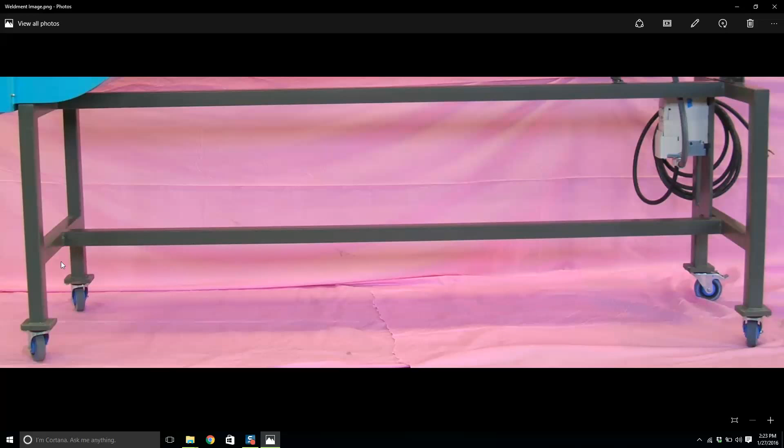Hope you're doing well. We're moving on to weldments number 2, and today we're going to the class work, just going over it. We're going to create a drawing for this - it's just an equipment base, a big long weldment with some casters on it. Something I drew up years ago. But the main thing is that it's a real part that was made, so I'm sure there's some dimensions missing.

So let's have a look. Let's get SolidWorks going. I'm going to create a 3D sketch. Here we go, 3D sketch.

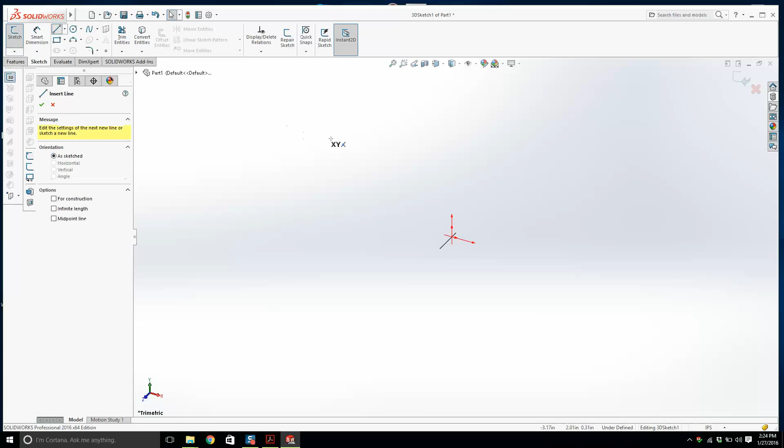We're just going over weldments. You're going to learn - we're just going over it, you're not going to really cover anything new.

So I'm going to draw 2 lines, and we'll make this the midpoint, and this is going to be along the Y, and these 2 lines are going to be the same along the Y, and the distance between them is 20.

So we make that 20. Now if that's 20, what's the length? It looks like from end to end is 101.5. Is that right? 101.5. Let's double check it. 101.5. So we have those 2 lines, and I'm going to hit tab.

I'm going to draw the end parts of it. Now we should be able to mirror that down, we'll just do one side. I'll go midpoint and midpoint, and let's make them the same length. Let's try that again.

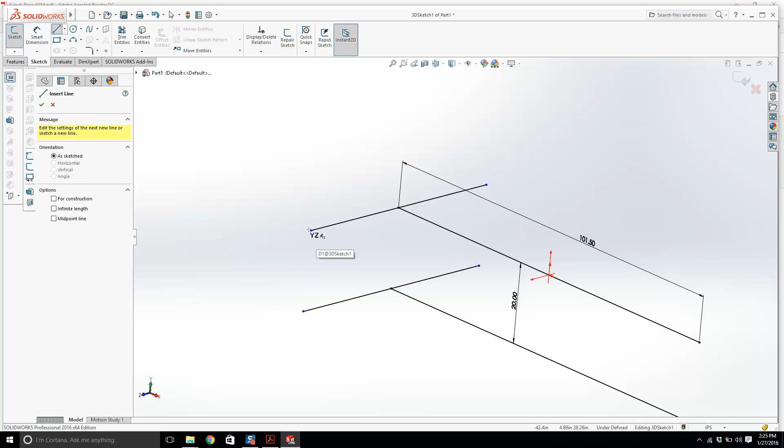Alright, what is it now? It's 14 plus 2 on either side is 18. We'll make this 18. Make that 18. What's the length of the legs? It's saying 28 is the length of the legs, plus 2 is 30.

I'll tell you what's going through my head. I'm just going to draw this out, and then I'm going to create the drawing of it, and if my dimensions are not matching up with this, then I will adjust the dimensions. That's what my plan is. So I got 30. I'll make these 2 equal.

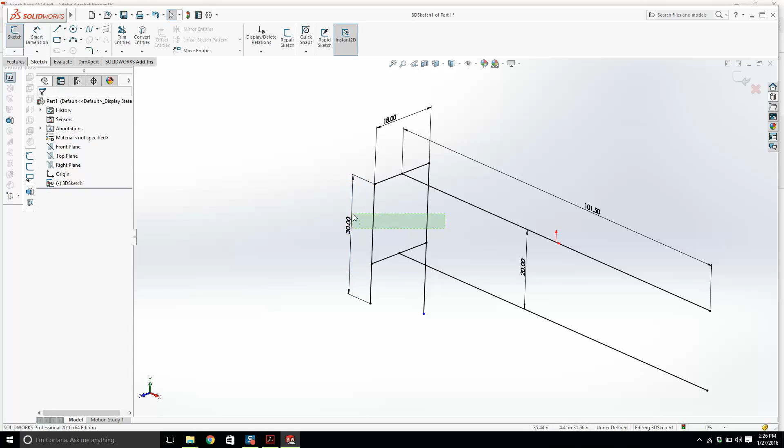Okay, I think that's enough. I'm just going to mirror this down to the other side, and then we can put the feet in. So let's go to here, it's 2 by 2 by 1/4 of an inch. Alright, we have one there and one there. That might work, yeah. And then we have one there and one there.

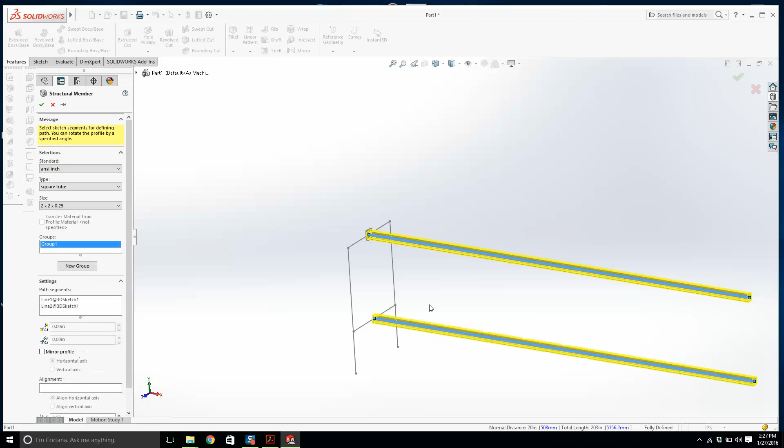See, that's - let's just have a look at this. We have, yeah. So we get that. Okay, we got that and we got that. Okay, new group - what about that and that? Okay, let's go to here. Let's go locate profile, let's lock it to the top.

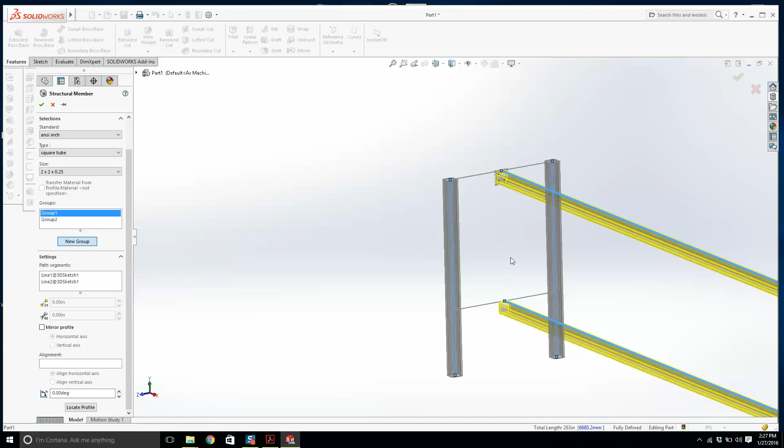If my explanations are a bit short, I made about an hour-long video on this, and Snagit bollocksed it up and lost it. I don't know how - if you've ever lost work before, it's twice or three times the motivation to redo it. I'm going to do my best. That's no excuse. Alright.

We'll do a new group. Okay, we got that, I'm going to click here. Now it's after extending that - we got to slow down here for a second. Let's see what we can get. No, I don't want it to extend that, but I don't really know because I don't know the dimensions.

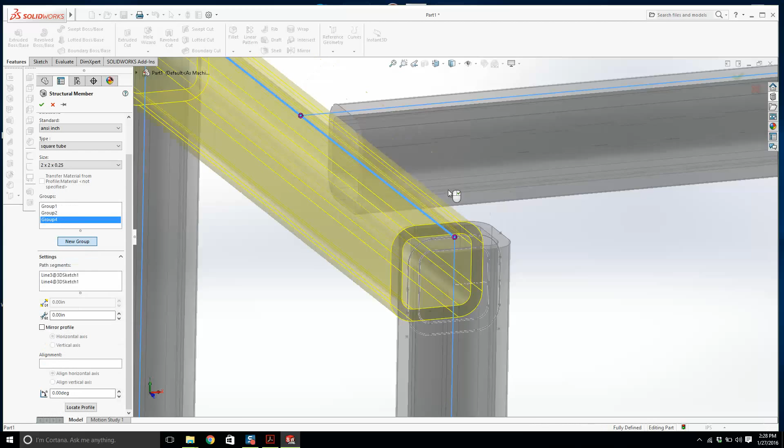And there, we'll locate the profile. Okay. That's good enough, okay we got that. I'm probably confusing some of you - what I'm doing is I'm just drafting this out. Look, what I'll do is I'll mirror it and then I'll check the dimensions.

Okay, we got that. Let's mirror it over - bodies to mirror, this and this. Okay, now we got that. Is that, it's not okay? That's fine if it hasn't trimmed it. We got a bit of an issue there. Okay, let's check the dimensions first.

So the end to end is 101.5. So let's check that - I'll go from there to there, and what do I get? 103.5. Okay, 103.5. So we'll go back to here.

I need to take 2 inches away, so 101 minus 2 is 99.5. Let me do that again. 101.5 - I hope you understand what I'm doing here.

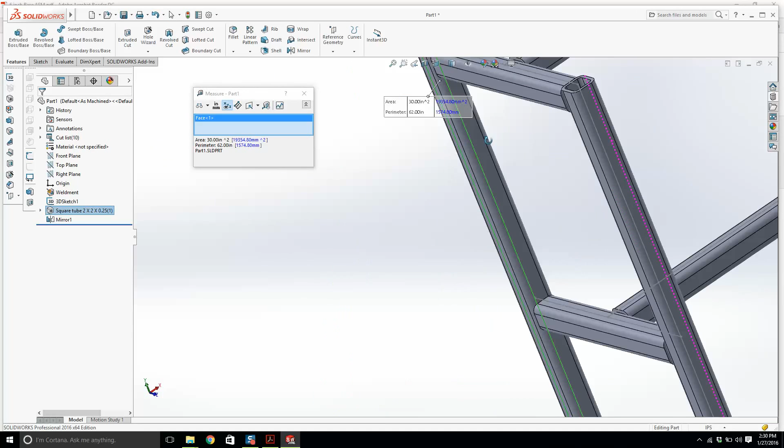We got 101.5. I got 30 from top to bottom - from all I need is really that line there. That's 30 from top to bottom. That's good. And then from there to there is 20, and I have 14 plus 2 is 18.

So I need to get rid of 2 inches there. So this is 18, we'll make that 16. Sorry if I'm going too fast and it's confusing you. Anyway, this is good, we've got no interferences there.

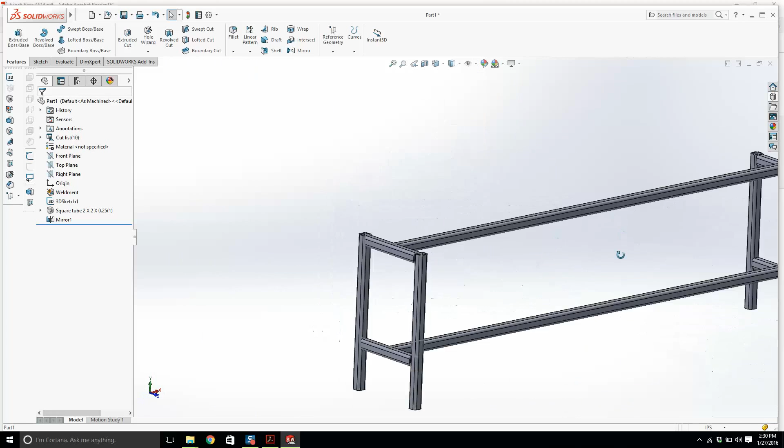On the other side, I need to trim this bad boy and this lad here. So what do we do? I'm going to go to trim. Bodies to be trimmed are that guy and that, and then the face is just that face right there, and it should cut both of them. I'll click okay, and it gets rid of the smallest piece automatically, and you're left with that. So that wasn't too bad.

Okay, we got this, I'm going to save this. I'm just going to save it here. We'll call it Weldments number 2 classwork.

And then I'll look at the feet. We're going to draw one foot, and then we'll mirror it all around. So I'm going to create a sketch on that face there, go normal to it, and get a rectangle.

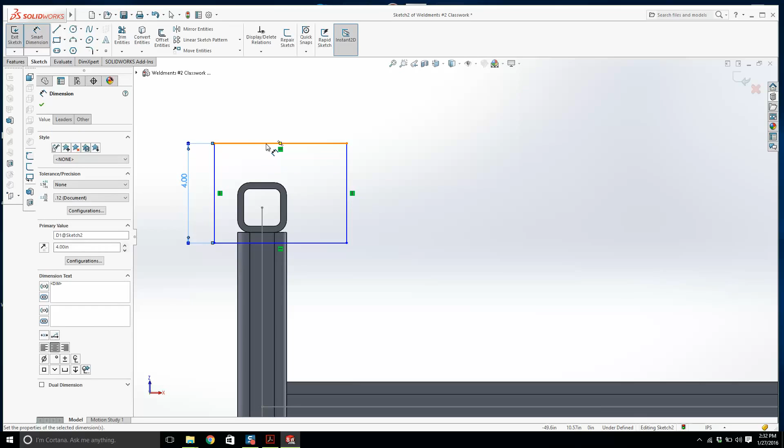It's 4 and 7. So this is 4, that's 7. This is a half inch, as I can remember from about half an hour ago. Half inch, and we'll get a center line.

I suppose the best advice I can give you is you should be able to - this should be no trouble to you. So just make sure what you're drawing matches these reference dimensions. I don't really care how you get there. Okay.

The fillet is 0.75. Come on now, let's get rid of this line, and let's go from there to there, and we'll extrude it - it's a half inch.

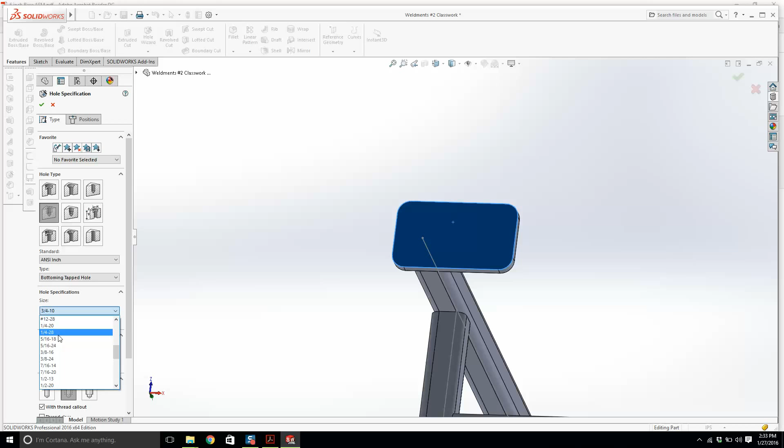Okay, the next thing we want is hole wizard. So it's 5/16-18. Let's close this down, we don't need that open. So it's 5/16-18, 3/4 is not right. So we have two 5/16 sizes - one's 18 and one is 24. 24 is the fine thread, 18 is 18 threads per inch. So the size of 5/16 is 0.3125 and it's 18 threads per inch.

Okay, so I'll click on positions and go 1, 2, 3, 4, and go normal to it. I'll get myself a center line. I'll make these lads horizontal and vertical, and I'll make this and this and this guy symmetrical.

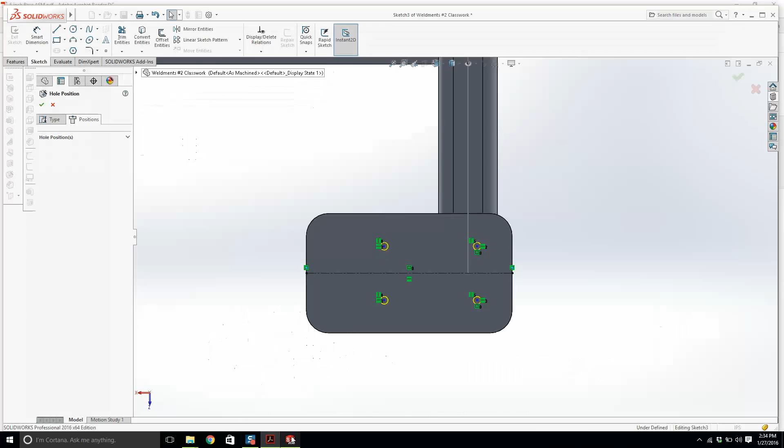And let's look at some dimensions - we've got 3.4 and 2.4. In reality these holes are off because I put a caster on it, so I'm going to leave these floating for the time being. Just leave them there, they're good. Trust me, leave them there, don't even put any dimensions on them.

Because they're wrong. And then let's get another hole - I'm going to go back and fix those later, it'll make sense. And then we have 3/4-10, hole size is 0.75 and it's 10 threads per inch, so it's a pretty coarse hole. 3/4-10, alright, it goes there.

What is this big threaded foot? There's a leveling foot, a big massive threaded foot. When you think of a foot, you think of a real human's foot, but it's just big - it's like a big threaded screw with a rubber end on it that they can lift up and level out the equipment if needed. So it's 0.8 from the front.

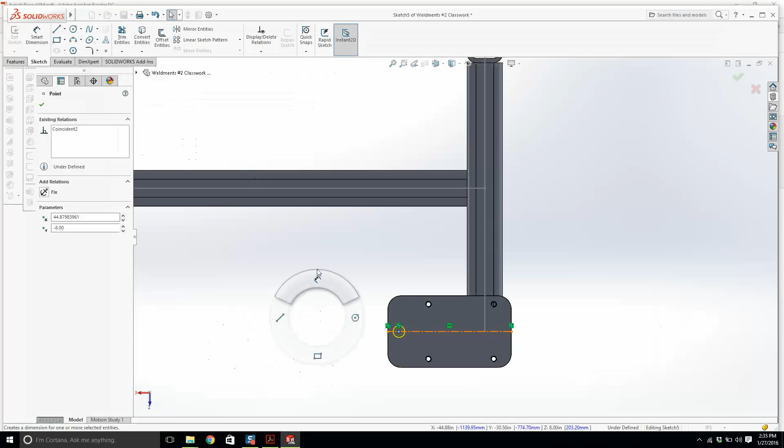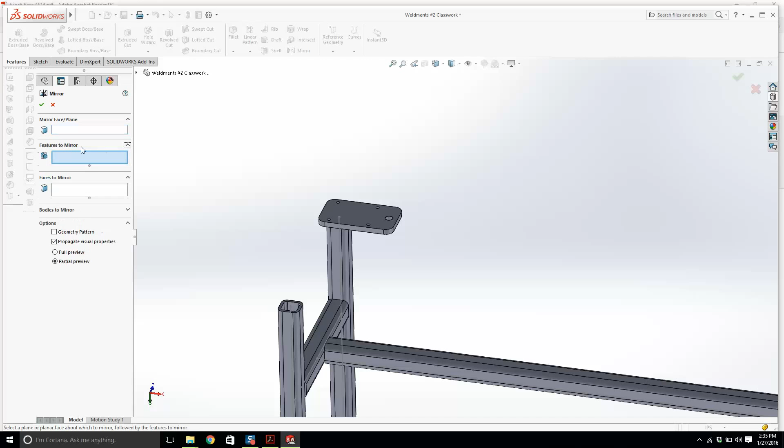Okay, now we got that. What we're going to do now is mirror it. Now, as I was saying before, whenever we mirror, let's do it - we'll mirror. You typically go to features to mirror. If that doesn't work, I would advise you to use bodies to mirror. And whenever you're doing weldments, each of these are really considered as bodies - they're all different bodies. So we click on this body.

Okay, the mirror face - I should be able to pick one of these planes. If you did not center your original 3D sketch, your mirroring will get screwed up, and it might get screwed up now, I think. But let's try that one there - that one looks well, okay, that looks okay. Let's check it, let's try the other one. If it doesn't work, you can always put in a reference plane - it's not the end of the world.

We'll do mirror, bodies to mirror. We'll mirror that guy and that guy. And that looks good, we'll go okay.

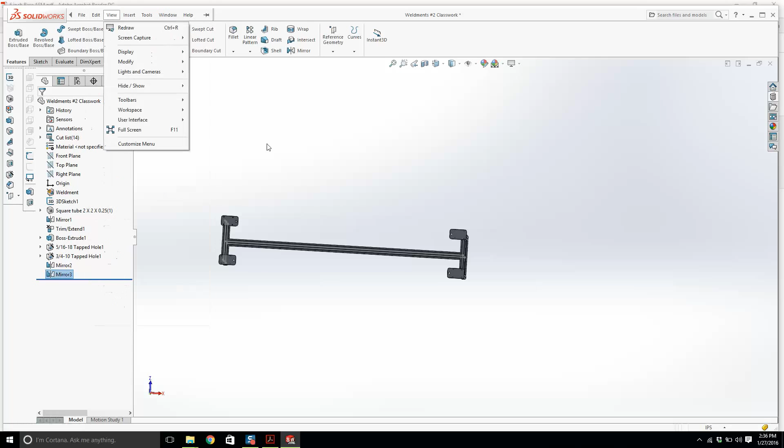And what else do we get? We've got to put in some end plates, and we've got to put in some gussets. So we'll get the end plates going - end caps. Alright, we want the corners, we want the chamfers, we want it to be inside.

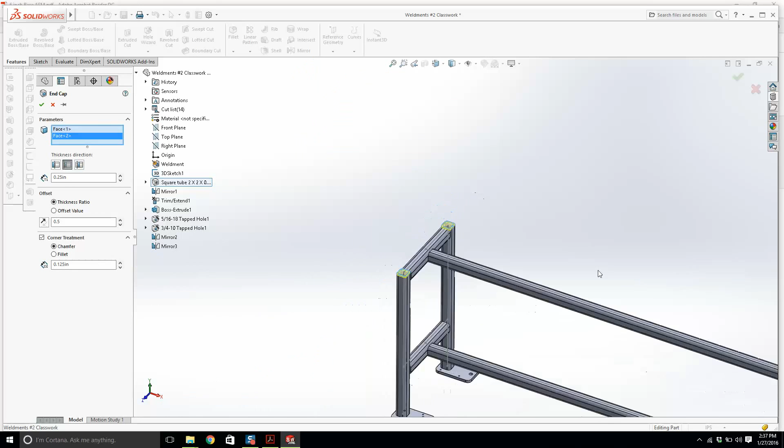Okay, that looks good. That looks the business. Let's put in some gussets as well for good measure. We'll make them 3 by 3. 0.25 is just fine. I'm going to hit the pin.

Now that puts in one. If I put in another, if I press enter, will that work? That'll do the job. I like that. That's faster.

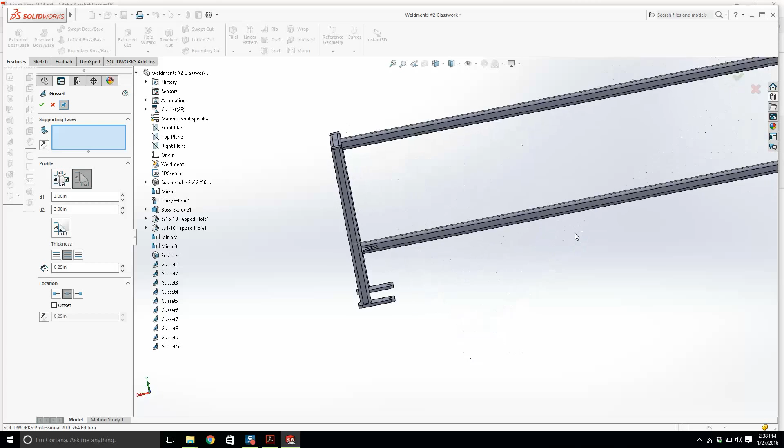Okay, so I'm just going through this here. We forgot this one here. I think what happened in real life when the guys made this, they just said to hell with those gussets. They're like, are you kidding me? But there's no harm in you guys putting them in just for practice, okay?

Do we have them down that bottom corner? Yeah. So we have the feet. Take your time, I know I'm rushing through it. It's just my second time doing it today.

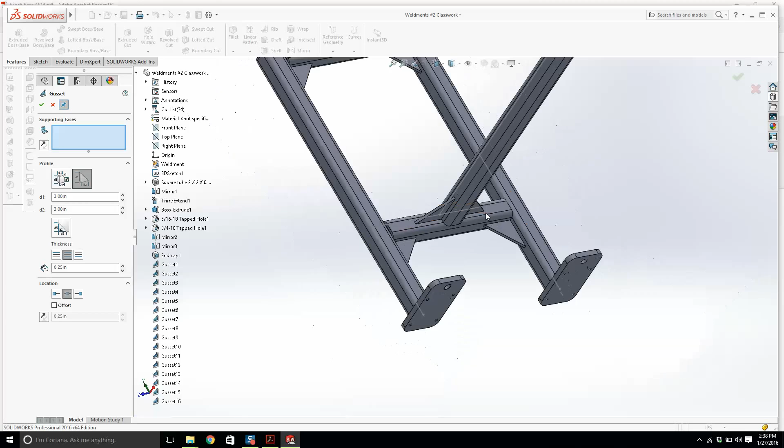Okay. Hide all types. Is that it? That's the assembly. Let's save it.

Okay, in your drawing we have casters. So I'm gonna get these casters from McMaster Carr. So we go to McMaster Carr, I'll type in the number. It's a cushion grey polyurethane on polypropylene wheels. They're lightweight. I would have thought we would have went with something a bit harder, a bit more structural, but that's fine.

I'm going to hit save, and I'm going to just stick this in the... I'm going to stick it on the desktop, okay? And what we'll do is I'll open it up. All right, there it is, beautiful.

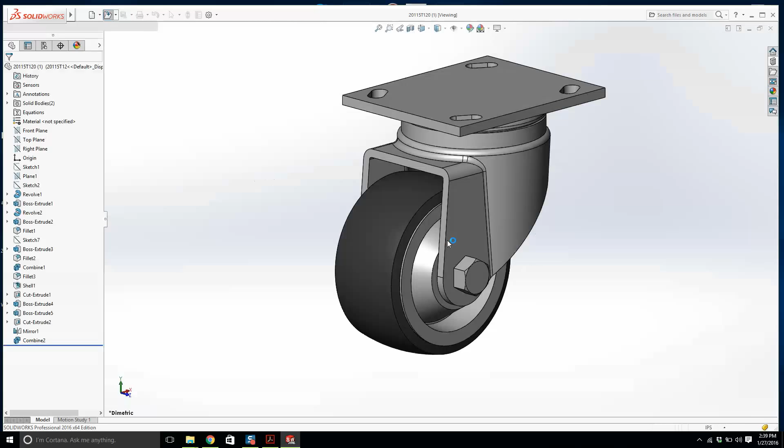The nice thing about McMaster Carr is whenever you buy a part from them, it's going to be a bit more expensive because they just are expensive, but they always provide you with a Solidworks model, which is nice, makes life easy.

Right, so let's go new assembly, and I'm going to put in the... Now slow down, don't plonk it right in. Read what it says, this is something I learned new. Select a component to insert. We've done that. Then place it in the graphics area or hit OK to locate it at the origin.

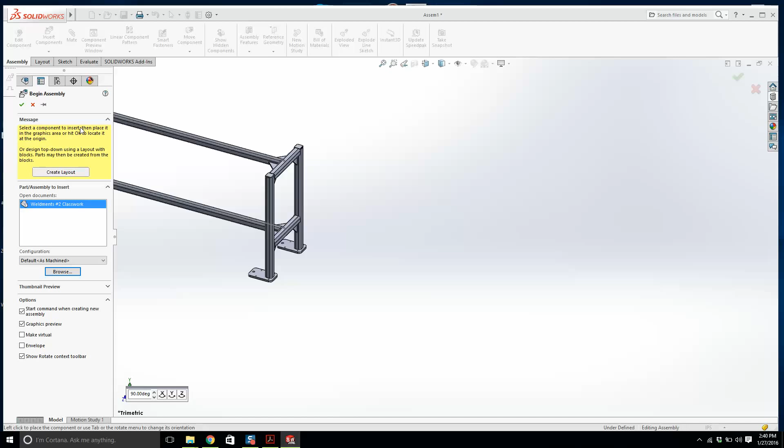Is that a good thing? Would we like it to be located at the origin? Yes, so I'm just going to hit OK. And look what it does - it fixes it, but look where the assembly right, top and front planes are. So that will work for us.

We're going to be mirroring stuff left, right and center. Now I'm going to insert the caster. Okay, you know where it goes. I'm going to mate this face with there. I'm going to mate using a width mate, a width mate.

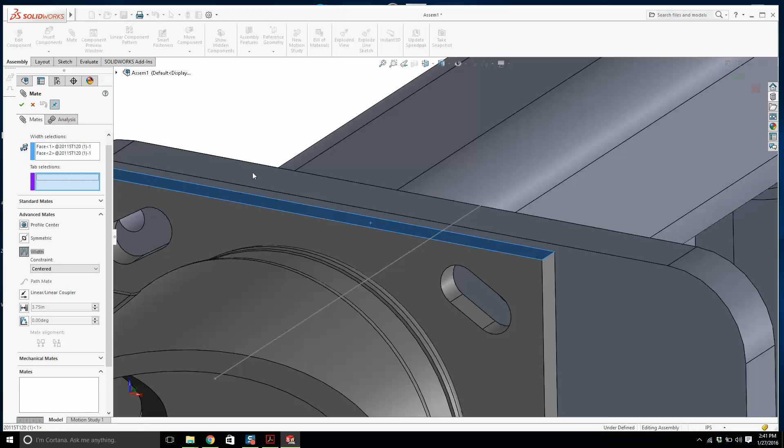Watch this, it centers it up, that face to that face, and I want it centered between that face and that face. It doesn't really matter whether it's a width or a tab, you can change those. We're going to make this - I don't want to move this caster too far down near that threaded hole, so I'm going to mate this to here. I'll make that a half inch.

Okay, now look here, those holes do not line up with those tabs. The dimensions that I gave you were wrong. So I don't know what happened there, but anyway, so let's fix the holes.

I'm going to do this. I'm going to turn on the wireframe hidden lines so you can see the slots. I'm going to right click on my part and I'm going to edit it in place.

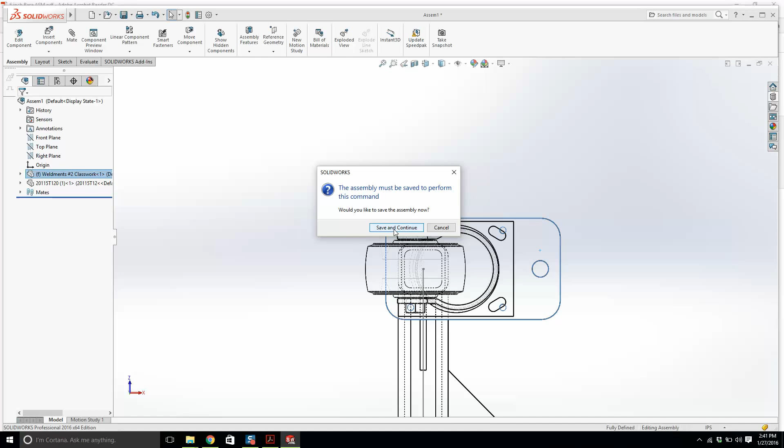Before you can do that, it wants you to save the assembly. So we'll call this Weldments number 2 classwork assembly. And then what do I do? I drop down my feature tree, even though I'm in an assembly.

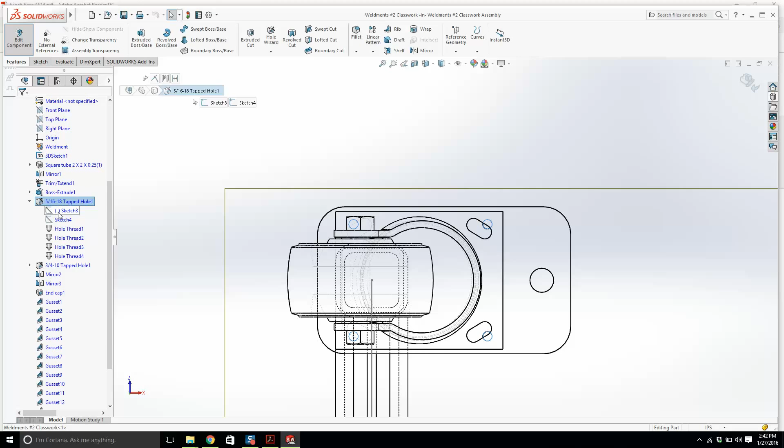I want to change these tapped holes, so I'm going to edit the sketch. Okay, what I'll do is I'm going to get a center line, and what I'm doing is I'm referencing those slots.

Okay, now hold on, I want to explain something important. So let me just do this first, then I'll explain it. Okay.

And I'll make this midpoint on there, and this midpoint on there. No, now why won't that... will it allow me to do it? Can I go and make that midpoint? That works. That's black and that's black.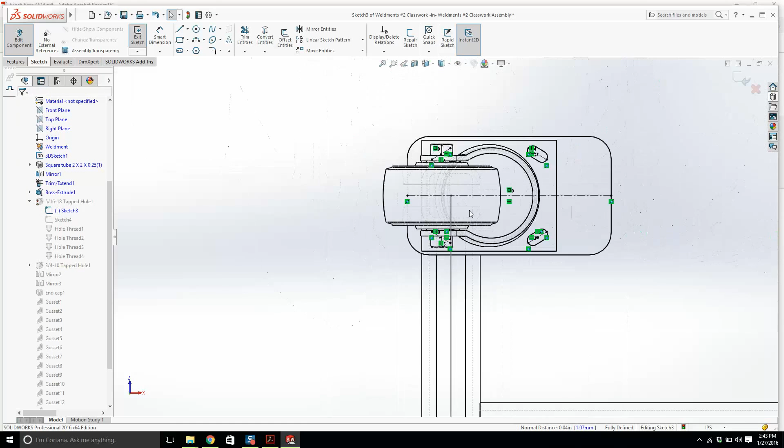Right, so I'll go ahead and rebuild everything. And you can see now the holes line up in the center of the slot.

So this is kind of important. What I just did there is I created an external reference to this caster, don't worry about that word so much. If I move the position of that caster, let's say I move it an inch, I'll do that real quick.

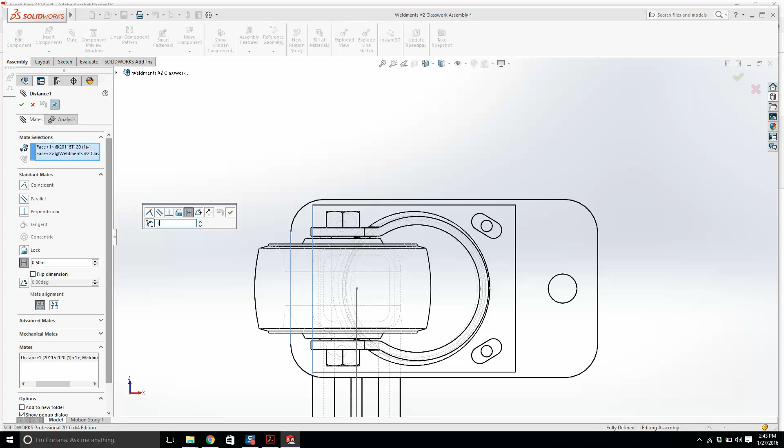In theory, what should happen is those holes should follow. I'll make it an inch, but they didn't follow. What am I going to do? I'm going to rebuild the assembly. Is it going to work? Interesting, it didn't work. Right, so there was an issue with those.

Yeah, there's an issue here somewhere. Okay, that's not good. Yeah, that fell on its arse. Now, I'm going to fix that. That should have followed, I don't know why. Let's put this back and let's make that 0.5, and let's see, does that fix it? I'm going to hit rebuild.

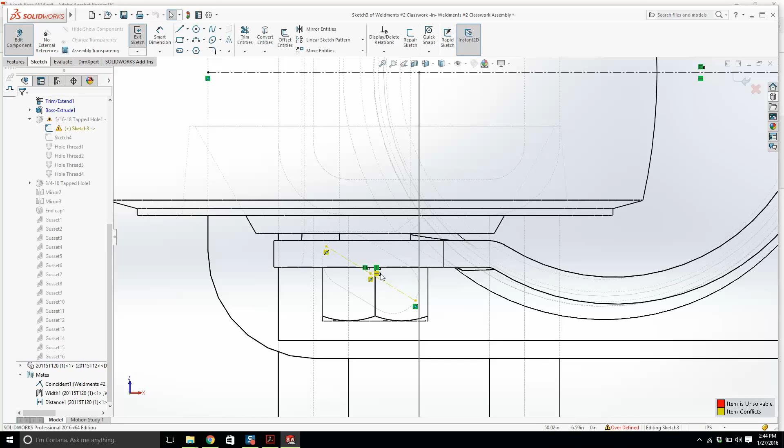It doesn't. Okay, now I've got to go back here and find out what's going on with this, yeah, see, there's some conflicting relations. We don't need these verticals and horizontals. I bet you I can get this to work. Let's make this midpoint, let's get rid of these verticals.

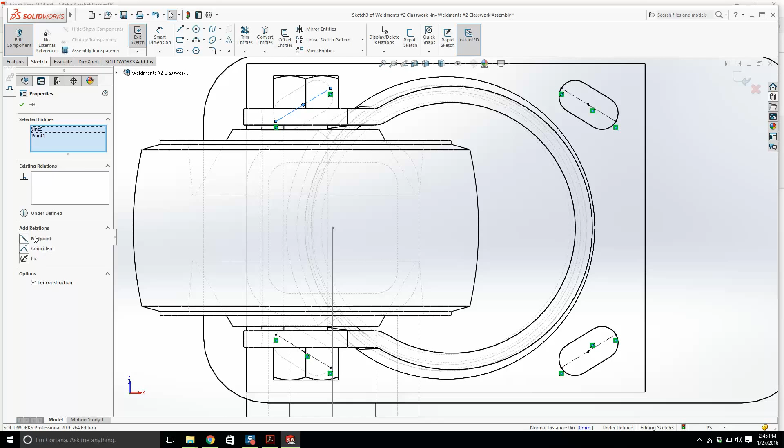Is there anything there? We don't need that symmetrical relation. Let's make this midpoint there, and let's see, does this work? I'm going to save that. I'll go back to my distance mate, I'll make it 0.75.

Okay. Is that right? Did I just screw that up? 0.75, okay. Now it followed it, okay. Let's bring it back, so that's good.

At least that works. There was an issue with the original horizontal and vertical relations that I put in. If you can understand that, that's kind of a big deal. That's going to save you a lot of trouble. That's an important step.

Okay, so we got that. So what I'm going to do before I mirror this over, I'm going to get the washers and I'm going to get the bolts. Okay, so let's just turn this off, let's turn off these sketches that I see here.

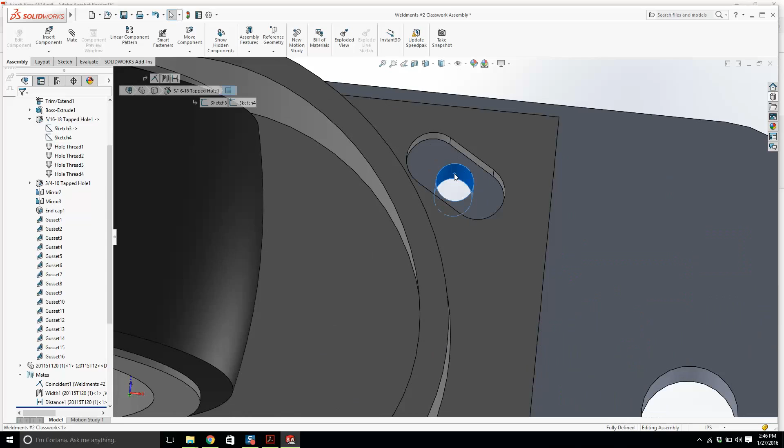Okay, so what is the thread here? There's a threaded hole there that we can't see, let's turn it on. Options, document properties, detailing, shaded cosmetic threads. Okay, is it there? No. Anyway, it's not coming up.

Alright, we have a 5/16-18 hole there. You would put a washer in, and then you would put a hex bolt. So let's download them.

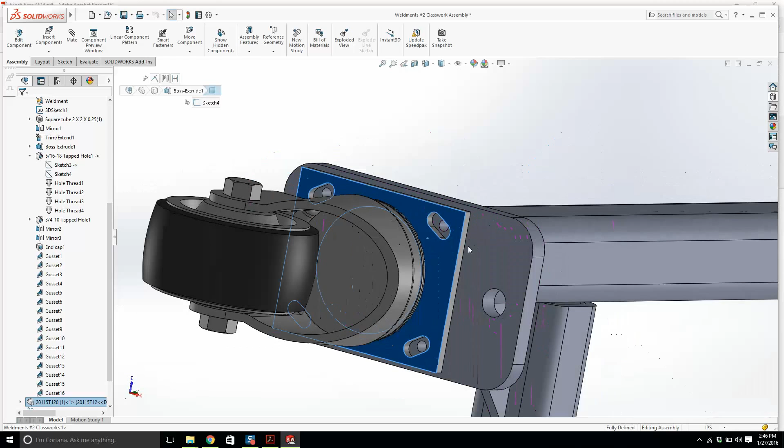So here, what do we put in? A washer, standard washers. And we'll do a screw size of what? 5/16, first screw size 5/16, flat. I'm going to pick the first one. It will work, or I'm sure all of these would work. They're for a 5/16 bolt.

Alright, I'm going to save it, I'm going to download it, I'm going to put it straight into my assembly. It's best if you download these into a folder and then bring them in. Okay? Let me show you how to do that right, or it's going to bite you in the arse.

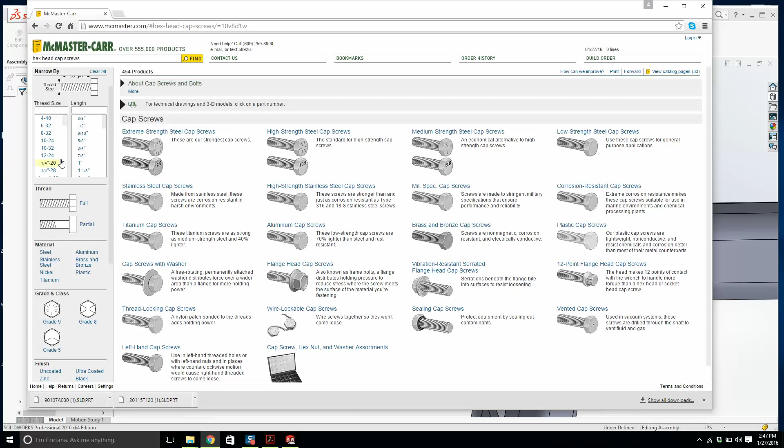Hex bolt, cap screw, what is it again? It's 5/16-18, the length is 3/4. We want full threads. You don't want it made out of plastic or aluminium, it will just break, you're going to make it out of steel. If you have the money, get a bigger grade, a higher grade, because it's stronger. This one will do.

Right, I'm gonna right click on this. Let's just click on it, it opens it up. I'm going to save as and save it on the desktop. Okay, save it in the same project folder. Okay, now we're going to insert it.

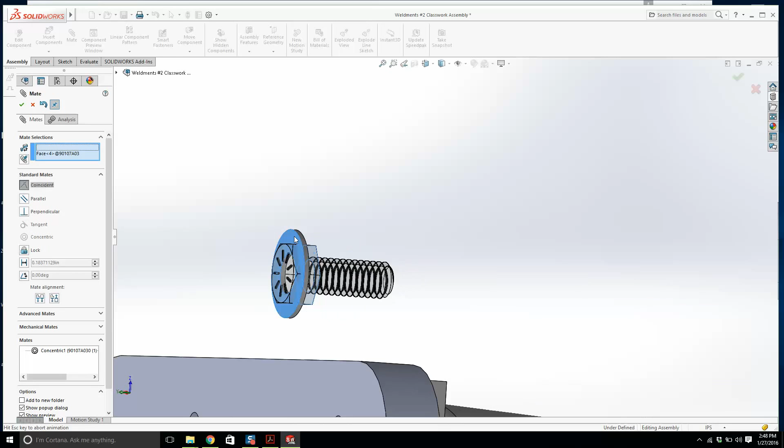Okay, and I'm going to mate this guy. It wants a tangent mate, let's try that again. This to here, watch that, see how it'll center it. That face to there, okay.

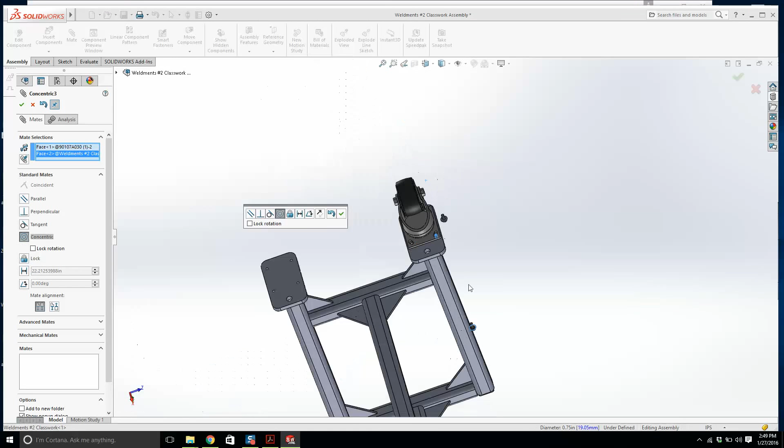Now I'm going to copy and paste this assembly. And what I found is it seems to put it very far away for some reason, I have no idea. So we put that inside there, but we'll flip it, and then I'll get that face with that face.

I'm going to rotate this component, just get it in the right orientation, and I'll get that concentric face with this concentric face, there to there, and there we go.

We've just installed half the hardware. I click on this face, on this part. I want to look for its front plane, and look what I'm going to do now. I'm going to go mirror components.

Now you're seeing me move at the speed that I would totally move. So I apologize if I'm going really fast.

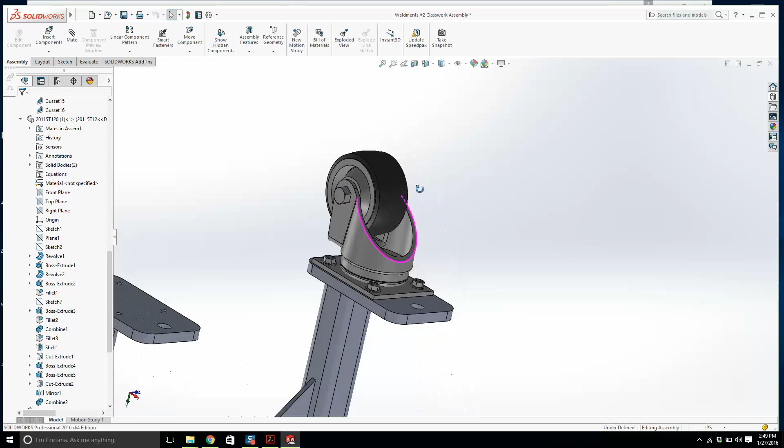Anyway, that there is all the hardware to bolt that caster in. Alright, now watch this.

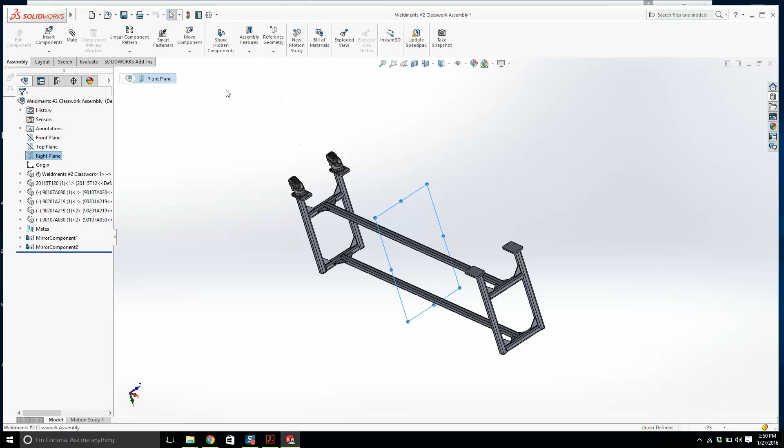We'll click the right plane. I'm going to go to mirror components. I'm just going to click here, grab all of this, and go OK, and it goes boom. Then I'm going to click this face, go mirror components, grab all of this, go OK, and now I have that there.

So there is the assembly. Now what do we need? Hold on a second. I'm going to create a view in my drawing that has an exploded assembly, just shows how this all goes together, just for one of them.

So I'm going to go here, right on the third tab, right click here, go new exploded view, and I'm just going to click that and that and that, all of these parts just on one side. You'll see in a bit.

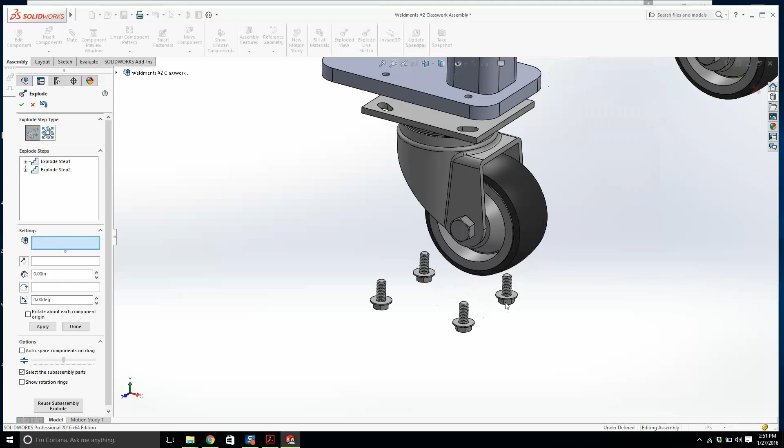I'll drag this out. This is good. Then I'm going to grab this and pull him back, and then I'm going to grab these four and pull them out, and that's it. That's all I need. I'm going to hit save, and go save all.

Let's close it down, and let's close this down. We're going to create a nice drawing for this. This was a sloppy drawing just given to them, probably spent about an hour on it. We're going to create a nice drawing for this project.

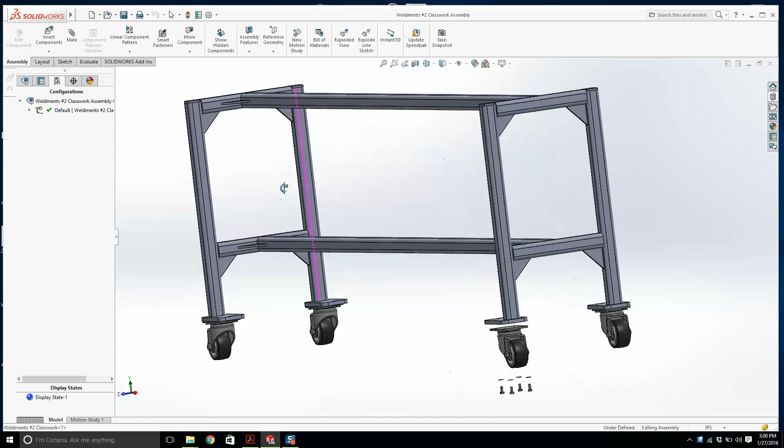Let's just make sure that it's okay. I was moving lightning speed. And it looks pretty good. In this configuration we can right click here, collapse, and it's back.

So we're going to create how would we create a nice assembly for this weldments with the casters. That's what we want to do. So you can see in our drawing it's a little bit rough, but we'll do a nice job.

So let's go new drawing, B 11 by 17. Okay, we'll just cancel out of this for 1 second, and we'll go edit sheet format, and we just get rid. This is just too much space that it's taken up.

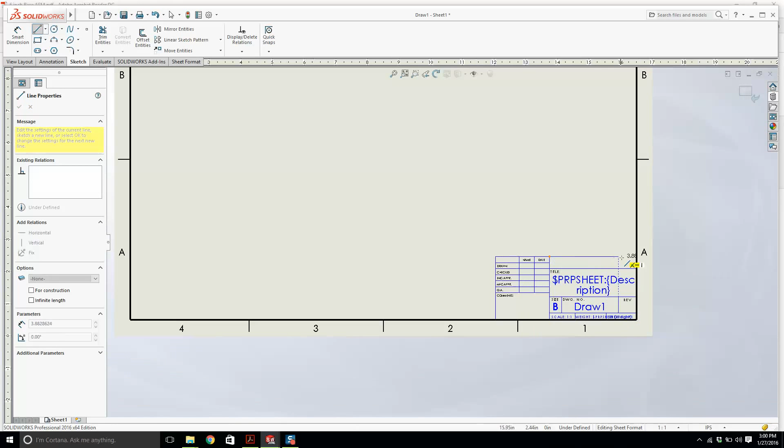You're probably saying to yourself, why are you doing this over and over again? I need to create a template. I'd rather just do this. It's good practice for you. I don't really care.

So model view, and we'll do an assembly, and we'll do isometric preview, and that's good right there, or even here is good. That's good, that'll do the job. We could even turn on the colors. Model view.

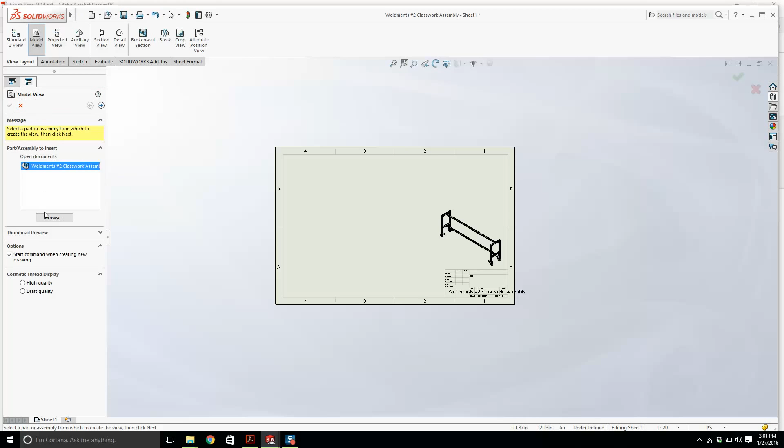I don't think we need the casters in on this, so I'm going to have to show you something new. We're going to create a configuration with casters. We're going to create a configuration without casters. The default will be with casters.

I'm going to right click here. I'm going to go add configuration. I'm going to call it without casters. Okay. And in without casters, I'm going to turn these guys off. I'm going to turn everything off. Right click and we'll suppress.

Okay, so watch this. I just highlighted everything by holding the shift key down. I right clicked on it and suppressed everything. I go back to configurations. I double click on default and I have my casters. I double click on without casters. They're gone. They're still there, but they're just turned off.

Okay, so let's save that. That's what configurations are. I don't think I've shown you that before, but they're very, very useful.

Okay, now model view. Yeah, look, that's overkill what we're trying to do. I could have just browsed and I could have just gotten the part. I could have just made the part. I just could have created the view out of the part instead of doing configurations. That would be easier.

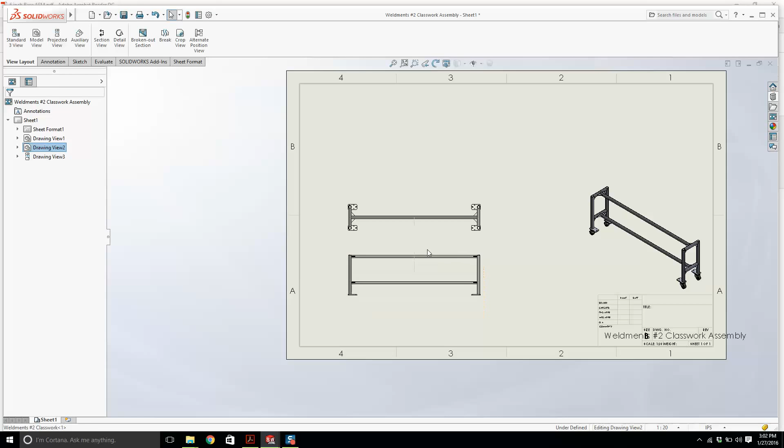So let's make these views a little bit bigger. 1:15. That's okay.

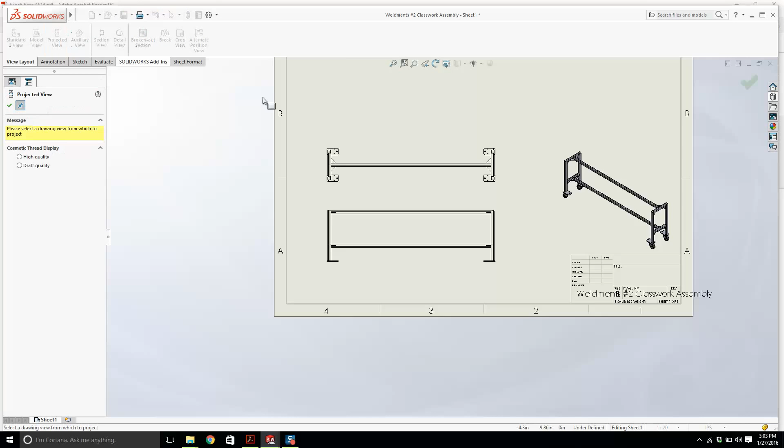What else are we missing? We have the table there. We need a right view. Might be a bit... optimistic to try and get all of this in one go, but we'll give it a shot.

I'm going to right click on this view and go tangent edge removed. What I'm doing is getting rid of those fillets, and the same here and here. It just adds to the confusion. Right click here, tangent edge removed - it just turns off the fillets, the curves you'd see, the extra line.

Now we're laughing, it's a bit easier looking. Okay, let's open this up. Let's go to the default and click on here, explode, and zoom in here. Okay, now watch this.

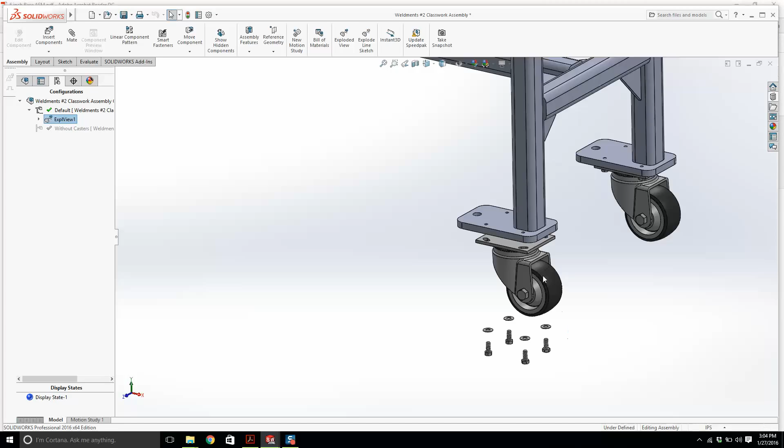Model view, exploded, current model view. Let's put this outside - we don't need that, it's not going to print it. Let's turn it on. We're going to get a detail view of this, and I'm going to put that over here, and right click on that detail, hide it, and click here and make that a bit bigger.

Oh, I like it, that looks good. So you can see how the things get connected. Right, what else?

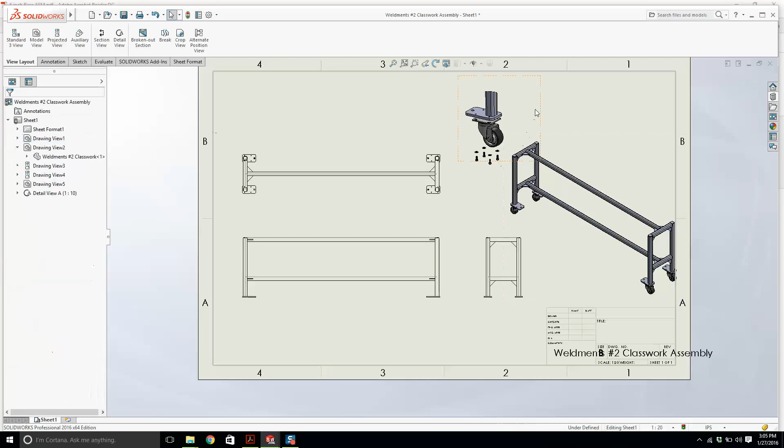Is that the best way of organizing these views? We could make this view a bit bigger. Put that there - that looks good. I like it, that works.

This is looking nice now. Okay, what are we going to do then? We're going to go insert, tables, Weldments cut list. I'm going to click on this guy, just go OK, and put that right there.

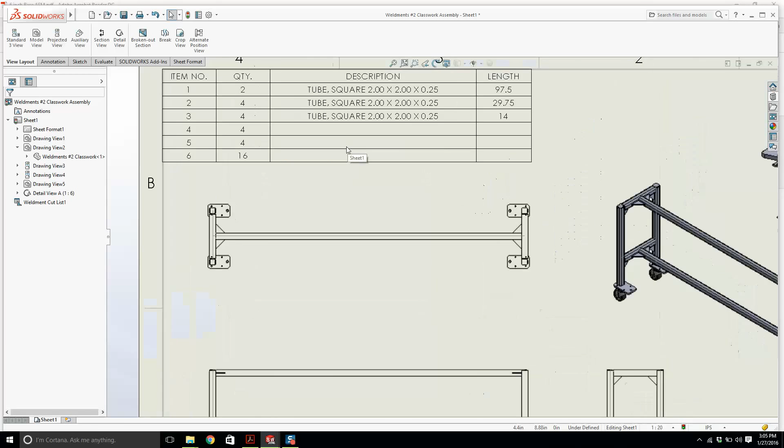Now hold on, we need to start putting some dimensions on this chap. This seems very big, I'm going to hit A. I'm going to make all of this 12 - we'll make it 11 even, and then we can just make it a bit smaller.

Okay, that's good, even the heights. Right click, formatting, row height. We could make it 0.25 - what does that look like? Makes it a bit smaller. We could even make it a bit smaller. Right click, formatting, row height, 0.2. It doesn't want us to make it that small. 0.205, there you go. And now we're putting manners on everything.

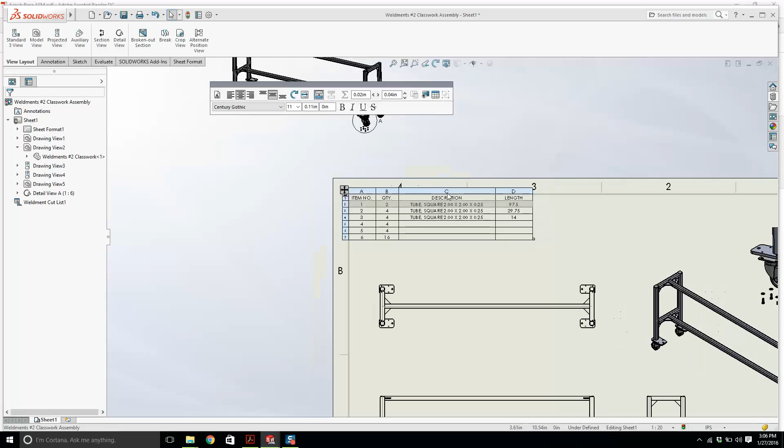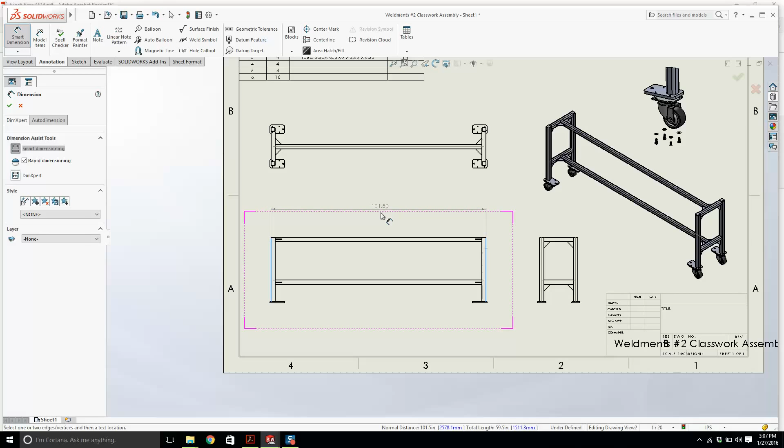So we'll go from there to there. This is an ISO dimension, so how do we fix it? We go to Tools, Options, Document Properties, ANSI. Another advantage of making you do this over and over again is you just remember where everything is.

101.5, let's do this from end to end. From there to there's 18 - I can't remember if that's right or not. 18, yeah. And then the last thing is we need 30.

And then we're kind of looking good. So we'll go from the top down to here. Yes, bollocks, let's try this again from there to there. Yes, 30.5 is good. So the overall dimensions are all working, so we're laughing.

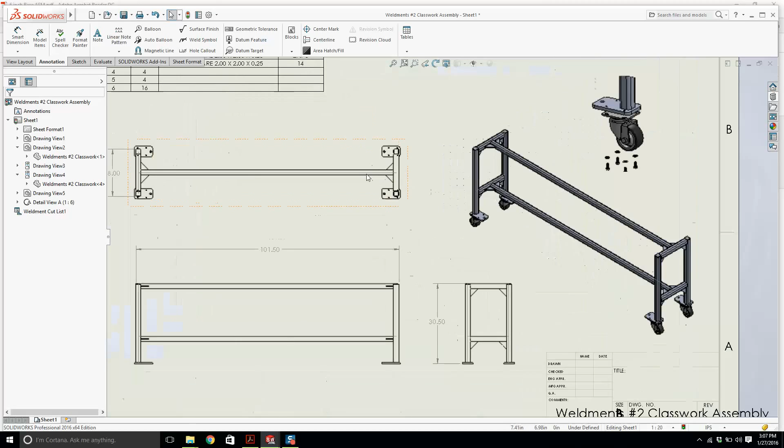What else do we need? We're not there yet, we need a detailed view of this. We need to make that a bit bigger. We need to make that 1 - we'll make it 1:6, that's a bit small.

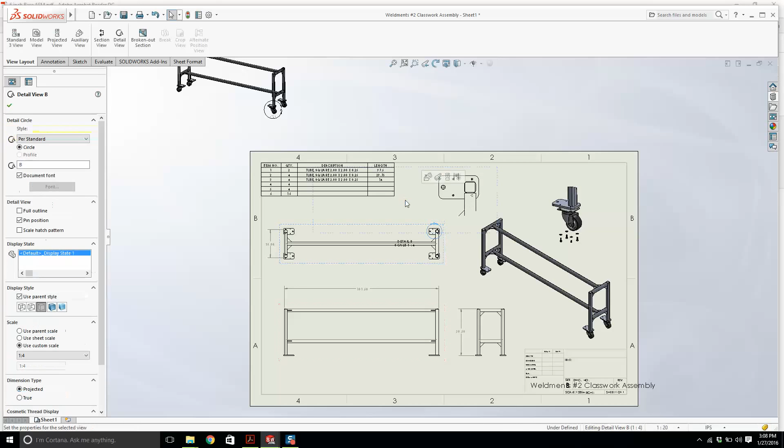1:4, that's good enough. We could make it 1:3 - too big, 1:4. I don't care about those numbers, whether it's 4 or whatever, it's just the size is what I'm interested in. I'm just looking at it in terms of the drawing sheet, that's all. We could make this a tiny bit bigger - we'll make it 1:5, okay.

So when I'm doing a drawing, I'm putting in all the views that I need, kind of spacing them out, playing with them, making sure I have all the views that I need. If there's too many views on the sheet, you have to have a second sheet. And then I start putting some dimensions in.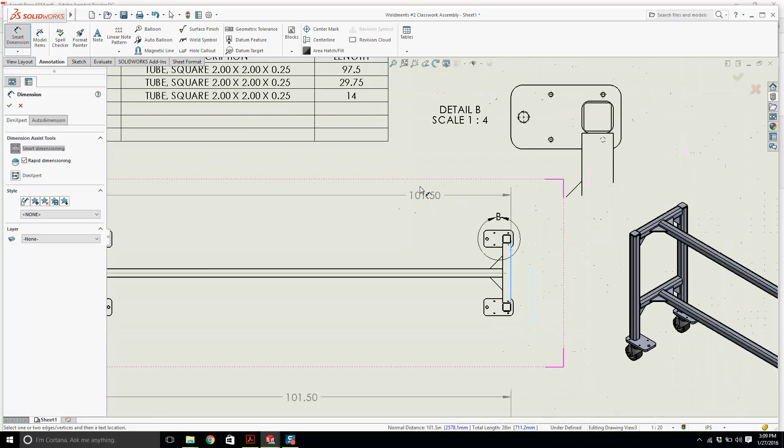Okay, so let's just go with this view here. And the rule is there's no, put more dimensions in if you have to. We got to 18. We could go from end to end, 101.5, and then we could put a dimension here, 97.5.

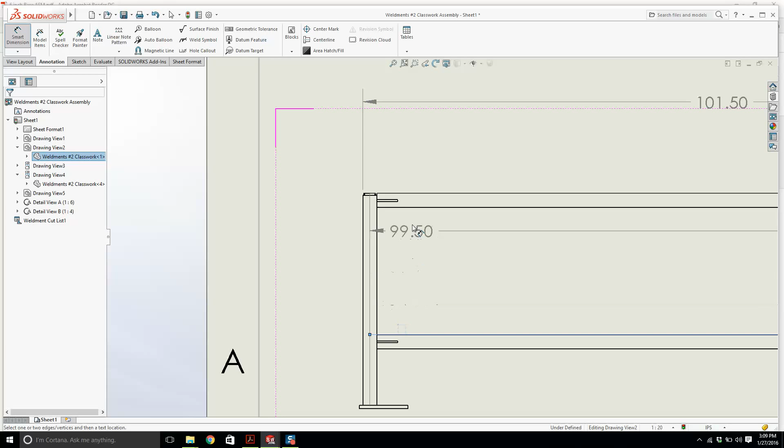What else do we need? You have the 18, you can get this 14 there. We can dimension at end cap later. We could go from there to there is 18. We have the 30.5, we have 18.

You could put this in if you wanted, from there to the bottom, 8.5. We need the thickness of this guy is 0.5. We'll get one of these dimensions here, 16.

We need to say that that's 3, so how are we going to do that? Let me see if I can get that point. No, it's going to be a pain. We can put it in here that the gusset is 3 by 3 by 0.25. Let's drag this down a tiny bit.

What else are we missing? These are all centered, right? Let's open this part up. Let's go to the cut list. What's item number 4? That's those feet.

Properties, we type in description. Spell it right, make it text. What is it? It's there, the end feet. Quantity 4. I press OK. Let's go to number 5.

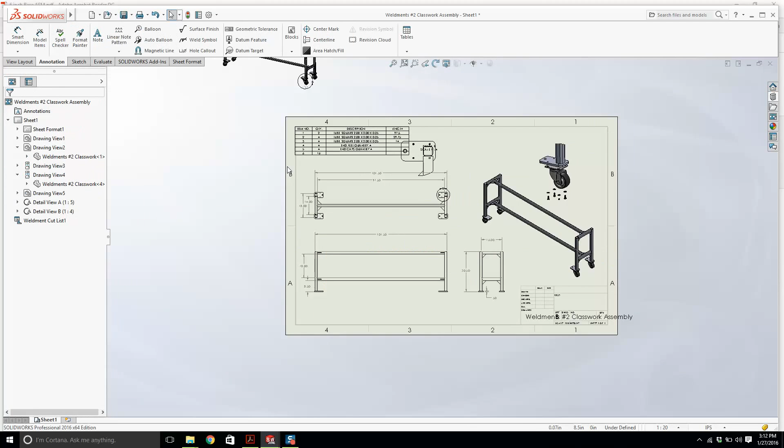Let's control tab to go back to the drawing, and let's have a look at that. Stupid thing hasn't come up. Okay, we got to go by and find out why that gussets hasn't come up.

Properties, description. DESCR, description. Okay, there you go, you got to spell it right. Save it, control tab, there it is right there. Slow down, take a breather for a second.

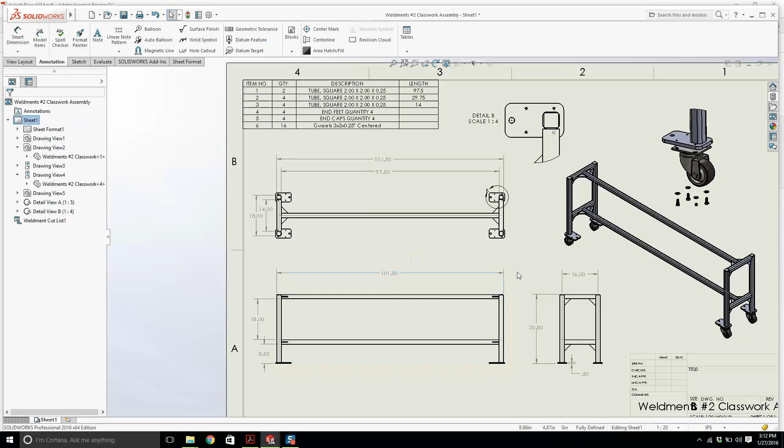Okay, do we have all the dimensions - we don't need this guy, I don't think. I will leave it in. They're all there.

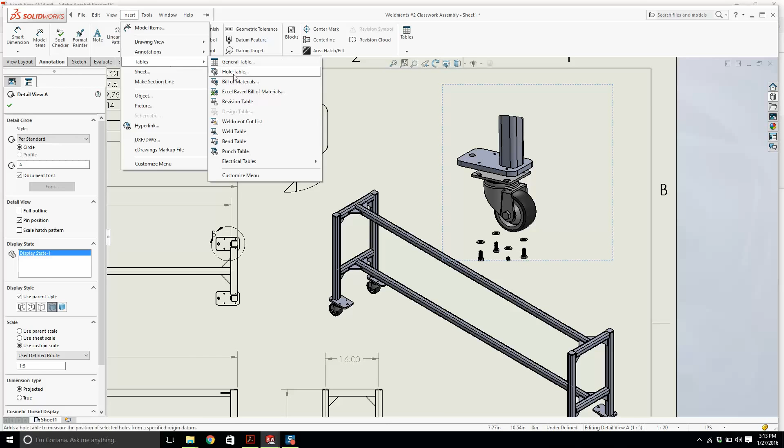This looks good. We need some parts here. What happens if I go - okay, this has been a bit lazy now. We need the part numbers here, so I'm just going to use balloons, but can I go insert tables, bill of materials? If I click on this, what's going to happen? Is it going to give me everything? That might do the job. Watch this.

I click on this, I don't care. I'm gonna drag this guy down. Watch this, I'm gonna drag this down to the very, very bottom. I'm gonna right click on it and I'm gonna hide it, hide row. I'm gonna click on this description, I'm gonna hide that - no, don't do that. Hide the column, hide column. This is making my life easy.

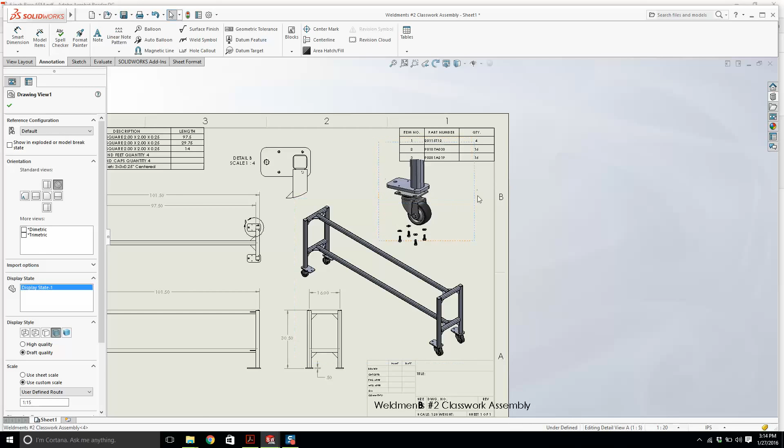Let's make this a lot smaller though, let's make this 10. Let's park him there, let's drop this down a little bit. What I was going to do is just use normal leaders to put some numbers on this. We'll go balloon 1.

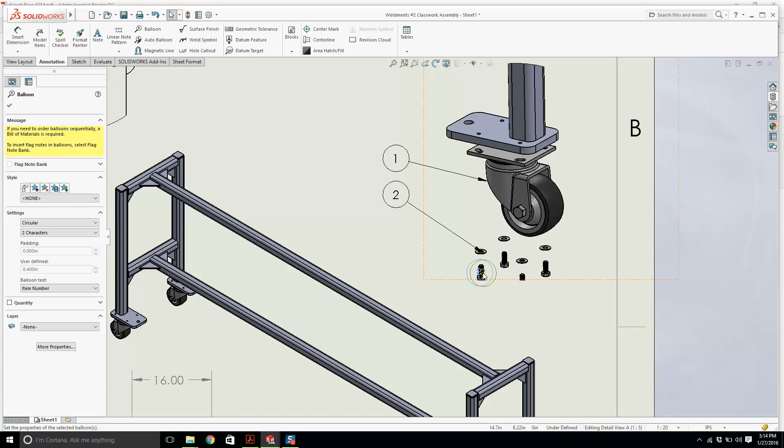Try that again. 2. Balloon - ah, bollocks of a thing. Balloon. Oh yeah, I'm having a good time. What it's doing is I'm trying to select these damn threads. Auto balloon. It's having a hard time selecting those. There, I got one anyway. Arsehole.

Okay, 1, 2, 3. Number 3, look - if you're even more eager than I am, right click here. You would add a column and say what this is: that's a 5/16-18 cap screw, and then your washer. Do you know what I mean? I've gotten into the habit of including the McMaster-Carr part number and the description. So that's good.

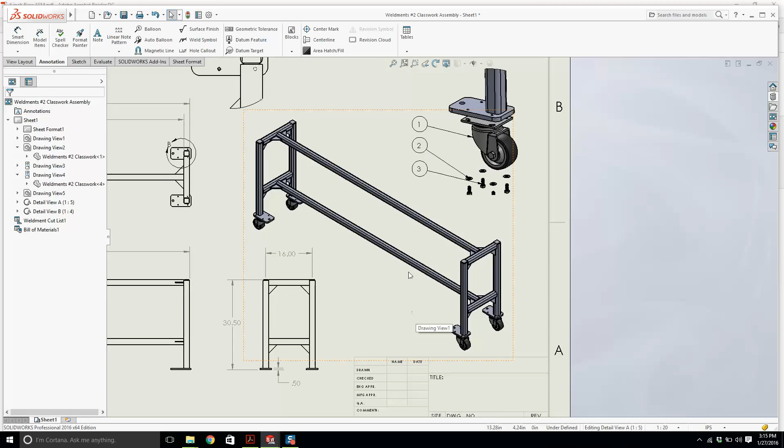What else are we missing? The title block. So let's put some dimensions in here. Hole call out, 3/4-10. Let's get another one there. 5/16. Let's leave him where he is.

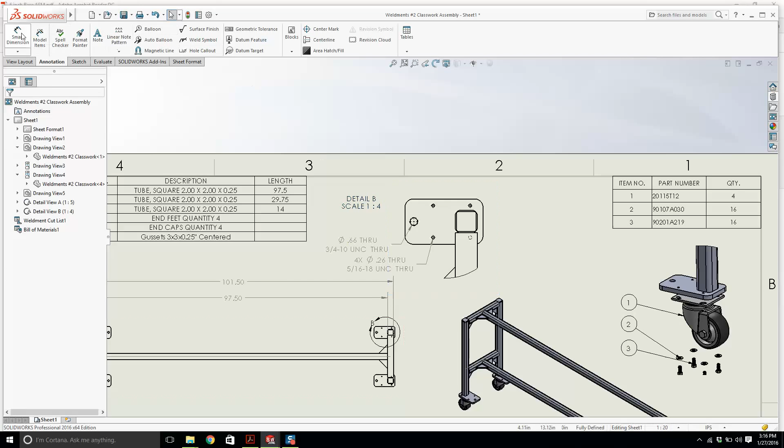If you find yourself really rushing and absolutely hating doing drawings, you're probably in the wrong business - you want to try something else. They can be frustrating, but you've got to override your natural reaction to just rush the hell out of them. I have to be honest, um...

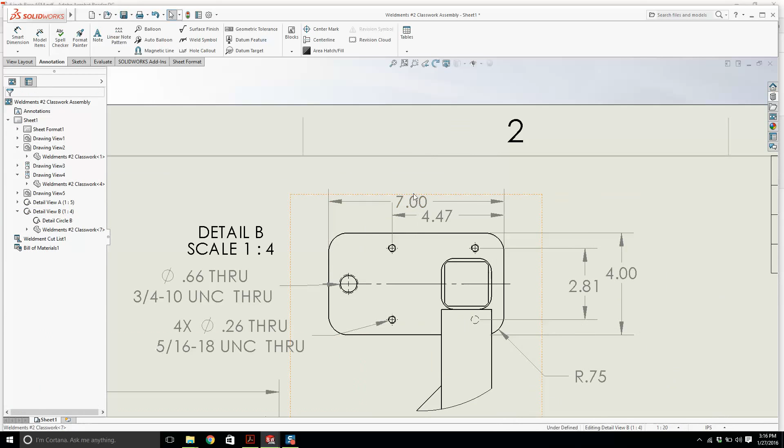Just move this down a little bit, get a bit of space. 7, 4.47. We need that dimension to the corner. Come on now, there you go. 1.16. We have a center line there that indicates it's in the center of the center line.

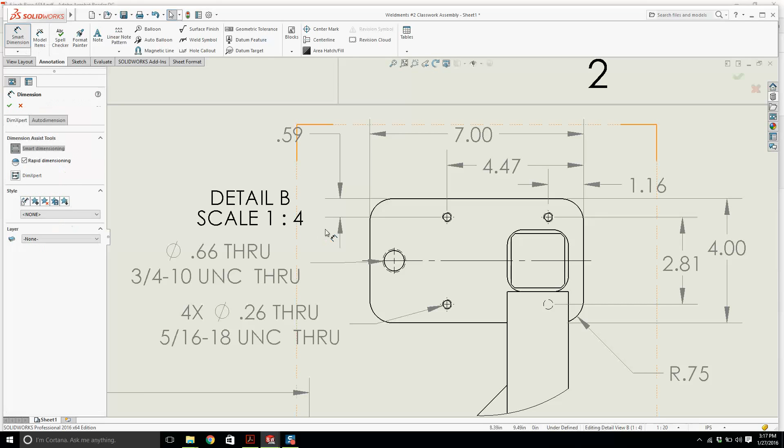There'd be no harm in just going boom and putting that in there as well. We also need this guy - so from there to there, 0.59. So it's fairly busy up there at the top. You could make this view a bit smaller.

Right click here, edit sheet format. Weldment, weldment number 2, class work, drawing number 01272016-002.

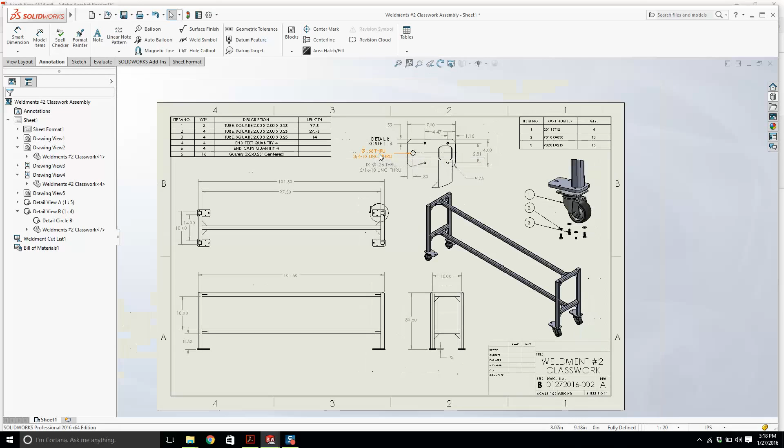Let's make this like 20, revision A. Stick in Anne Arundel Community College, stick your name in there, get the logo going, put it down the bottom left hand corner. Have a bit of pride in your work. I'm pretty happy with that. Okay, give me a break now and then we'll move on to the homework, but this is your class work.